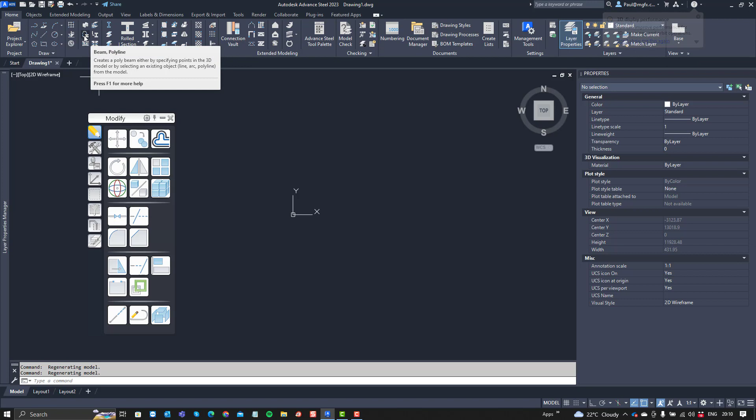So for starters, we need something like a beam. We're going to draw a beam quickly, using beam by polyline, drawn from 0,0,0. In the x direction we'll go 600 at 0y.

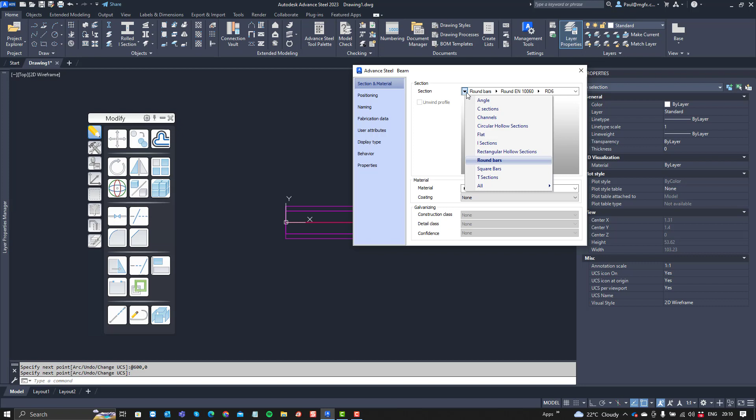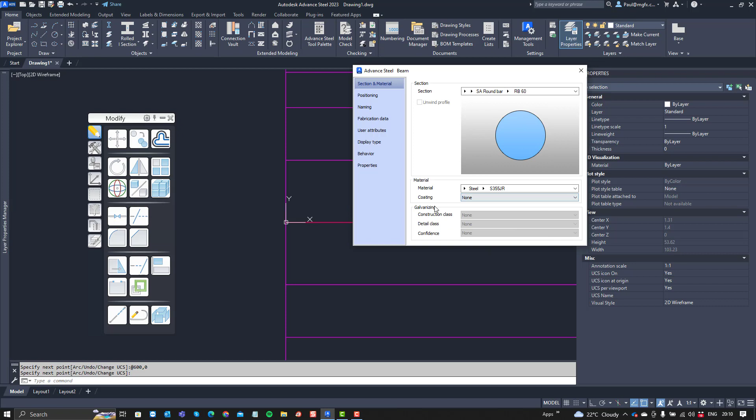Because we're in South Africa, we'll choose a circular section from round bars, selecting our South African round bar, and set that to a 60 diameter. There's the positioning, the angle, the naming. Let's call that B1 for now, and we can leave the rest for now.

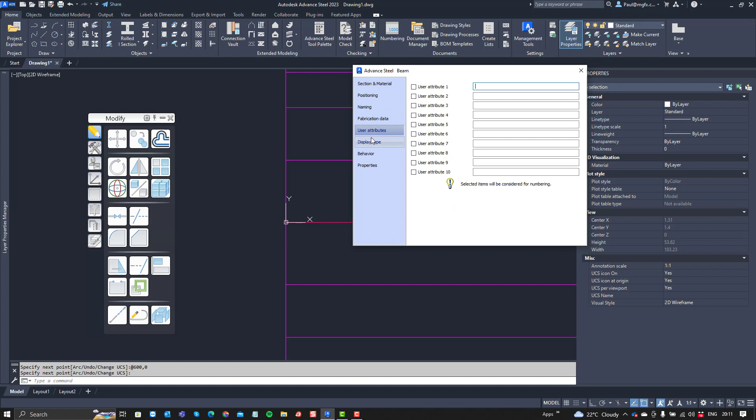We can define it as a main part, with some more fabrication data that we'll leave as is. We just want to show how to create the geometry. So there we've got our shaft or beam. Let's go through an X-ray view so we can see what that shaft looks like.

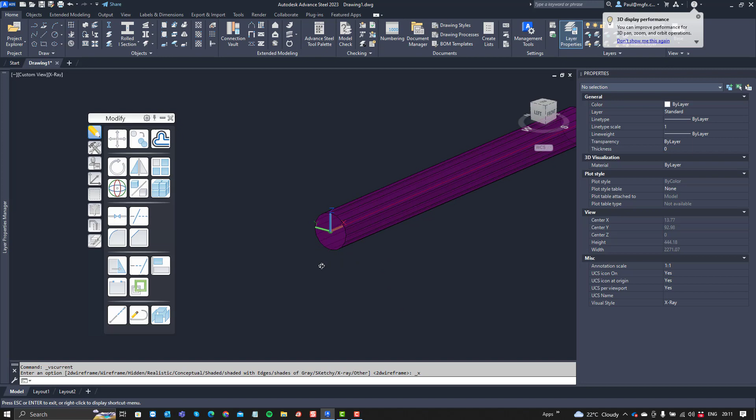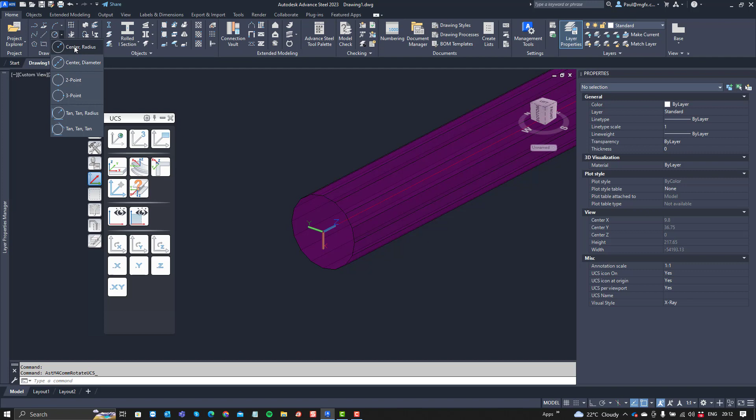So the idea now is to take this diameter and turn it down. To do that, we first need to change our UCS. I'll flip the UCS around the y-axis by 90, and now we have to draw two polylines. I'll demonstrate by creating a circle with a center radius.

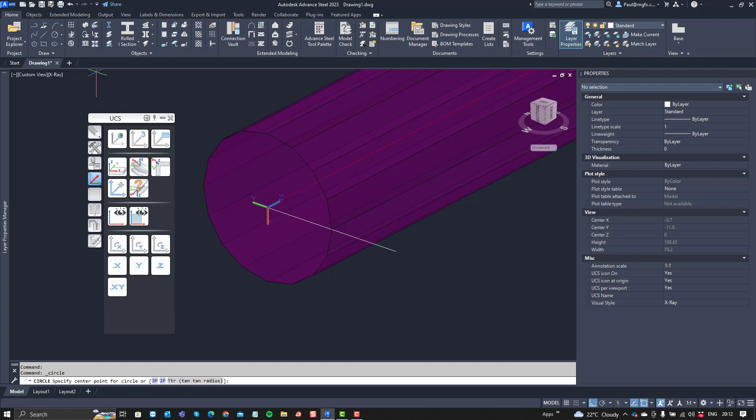Let's create a line from 0,0 and bring that out to 60 scale. Let's quickly draw a circle there. Now I'm going to hide the shaft temporarily down here using hide objects, which will let me draw this quicker. So that's the exterior of the shaft.

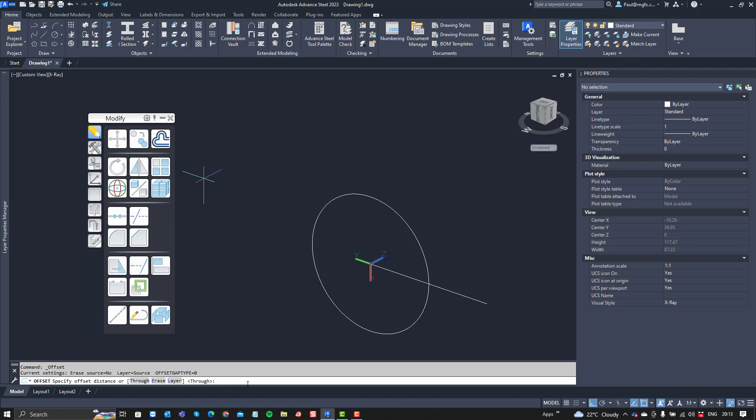Let's suppose we want to turn it down by 5 millimeters, and then you can offset that. You can increase the diameter of that circle and create that line through to the other side.

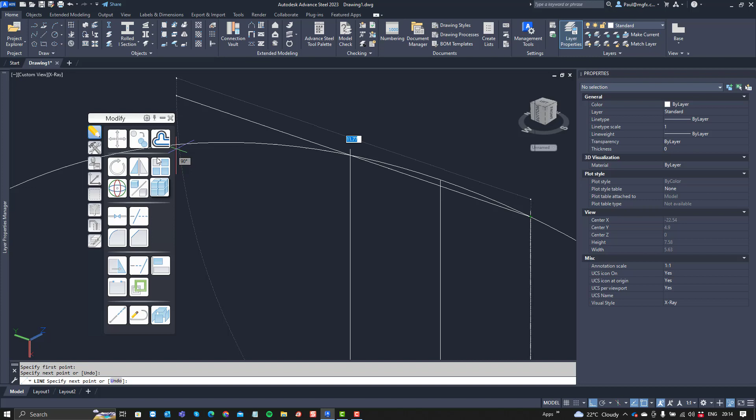And let's suppose we want a keyway. Then we can draw the keyway over there and offset that. So we've got a 6mm key in total, so we'll offset this line by 3 millimeters, and let's suppose we take it in by 3 millimeters as well, and offset by 3 to the inside, so that will be our keyway that we'd like to take out there.

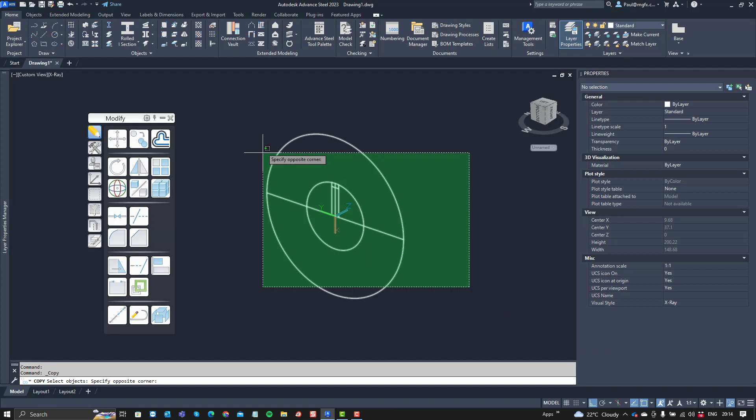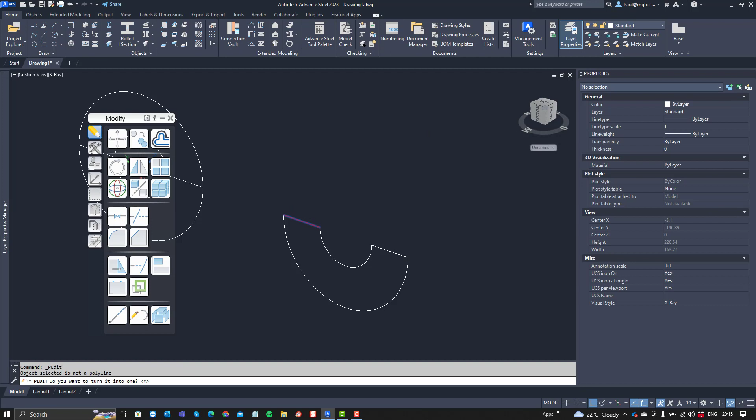We need to recognize that Advance Steel requires 2 polylines, so we'd copy what we've drawn, then trim that. Let's quickly change that into a polyline. I usually change the color so that if I p-edit and join and everything turns red, that means it's all been added to the polyline.

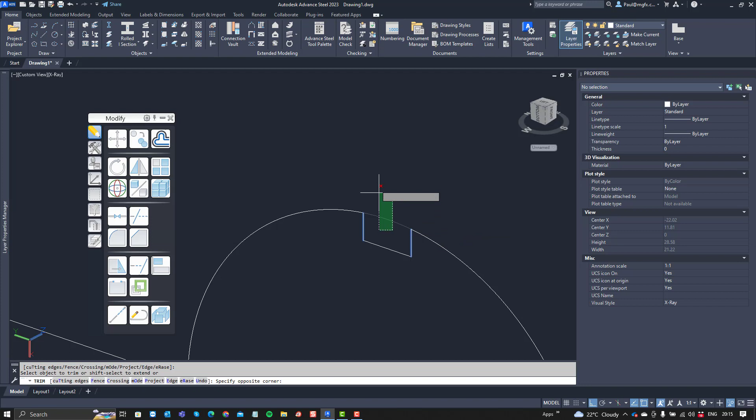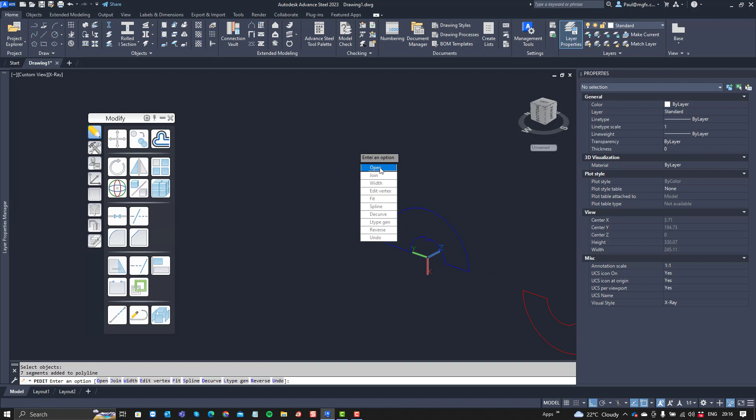I need to do the same thing up here, so I'll trim, erase that and trim, and trim again. Just going to leave this as blue, change that into a polyline and join. Unfortunately you have to split it into 2 like that.

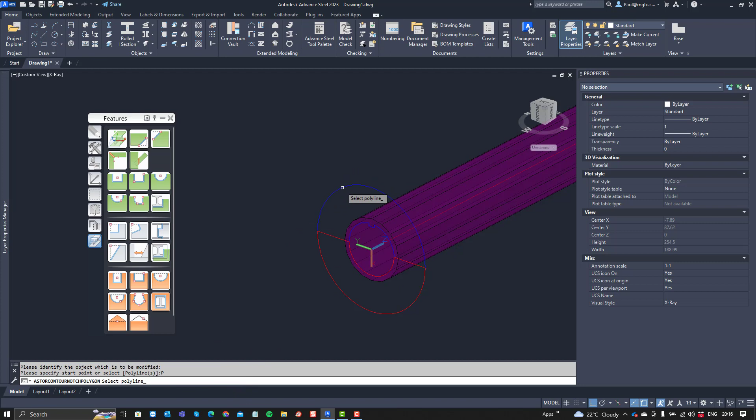Then leave those profiles on the side of the shaft, end the shaft isolation, and the last step is to use this tool, the polygon contour. I select the shaft as the element, choose a polyline there, and go into side 1 by 50 millimeters, and accept that. So there's our 50 mil. Let's change it into a shaded view, it's easier to see.

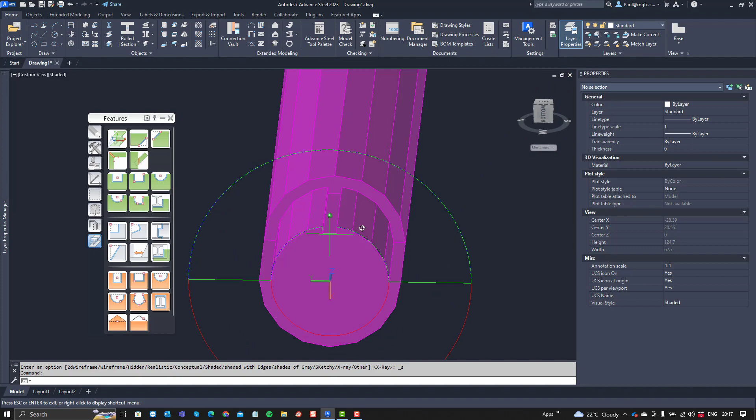The polygons are just the level of detail of this view for polygonal items. If you increase that, it'll be nice and round, but you can see the circle is being cut away and we've got the keyway. So when you generate the drawings for this part, it will include the keyway and the shaft cutout, and of course we just have to do the last one as well.

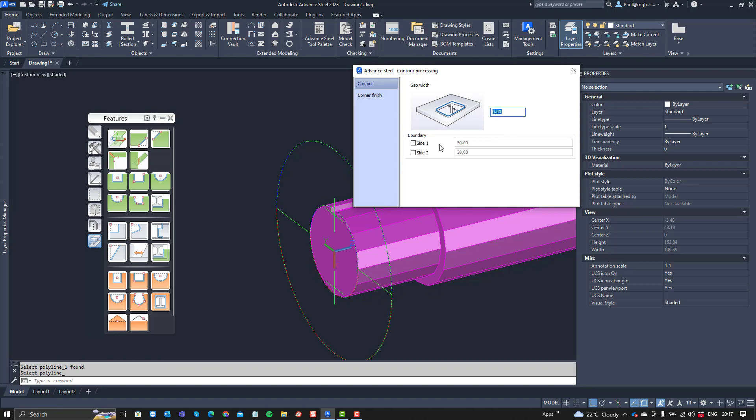So we do the same command, also polyline, choose that one, and turn it through side 1 by 50, and accept that, and there we go. We've now turned that shaft down on one side, and it's ready for us to generate our drawings from.